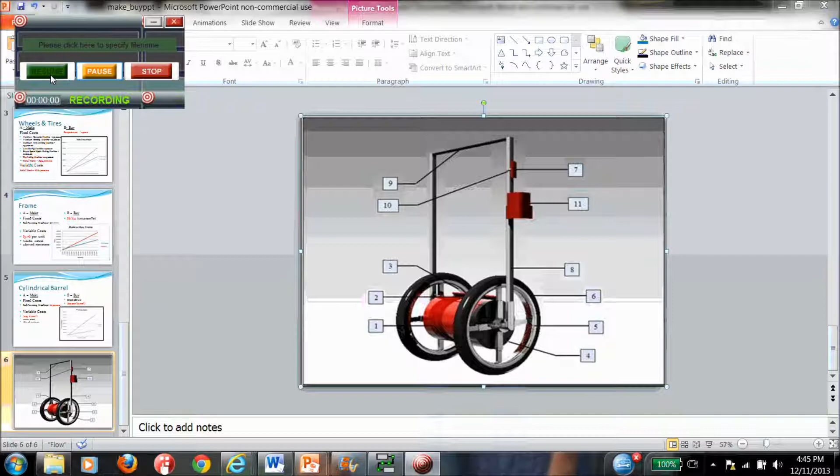Here's the AutoCAD model that we used to model the machine. Part number 1 is a cylindrical barrel made out of plastic. Number 2 is the filter. 3 is the lid, and 4 is the drain plug.

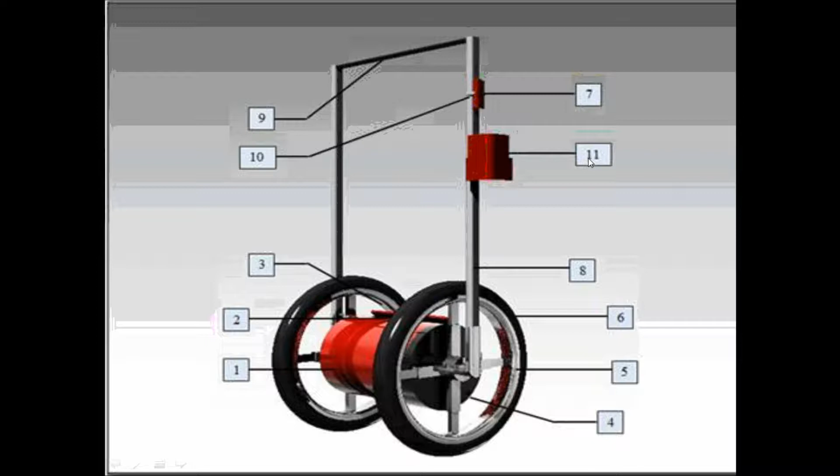5 is the rim, 6 is the tire, and 8 is the sheet metal frame. Number 9 is the handle, 10 is the bracket, 7 is the soap dispenser, and number 11 is the water container that we're going to use to hold extra filtered water.

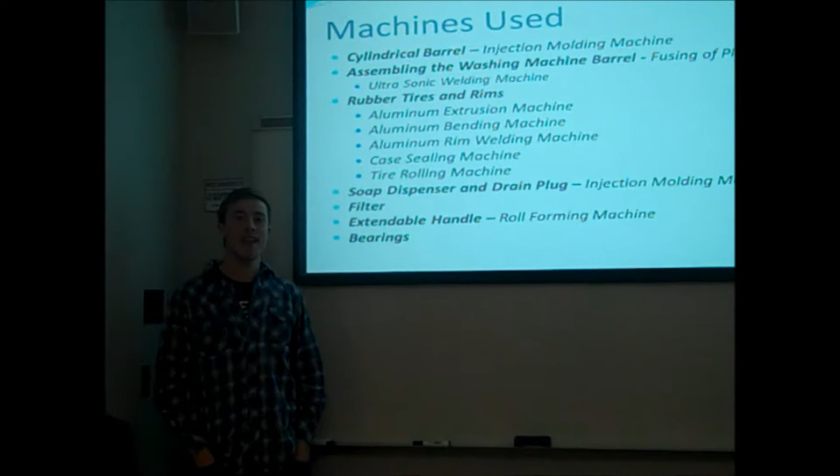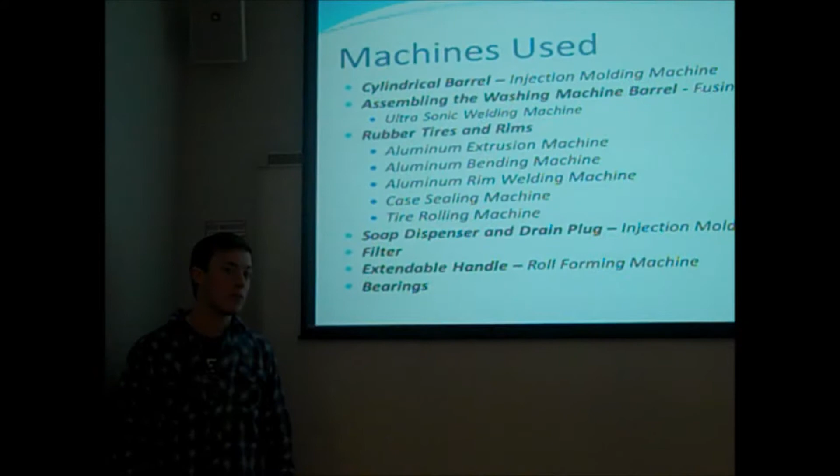Within the process, we need to analyze what machines we're going to use for what parts. The cylindrical barrel, we're going to use an injection molding machine. I thought that would be very easy because you can pour the material into the machine and it can mold it within the mold very quickly and very efficiently.

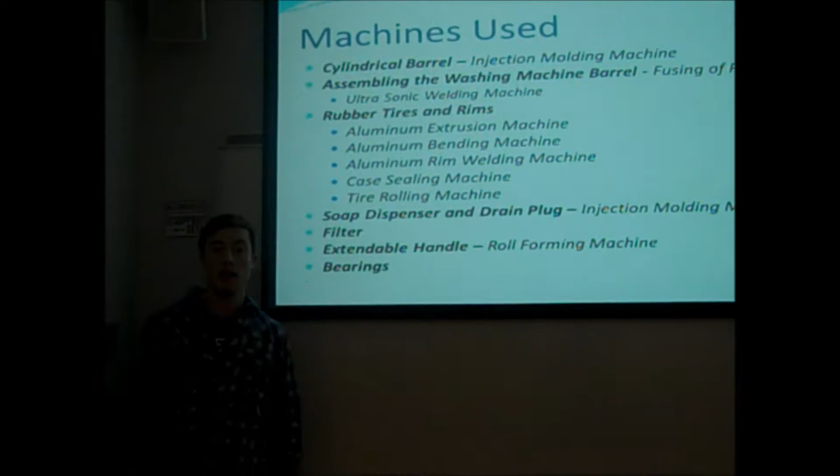Assembling the washing machine, we're going to use an ultrasonic welder. We're going to fuse the plastics together, and again, this is going to eliminate bolts and screws.

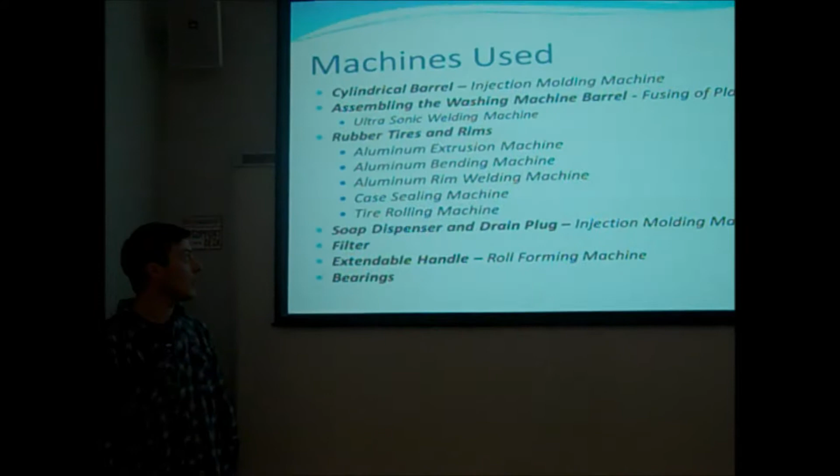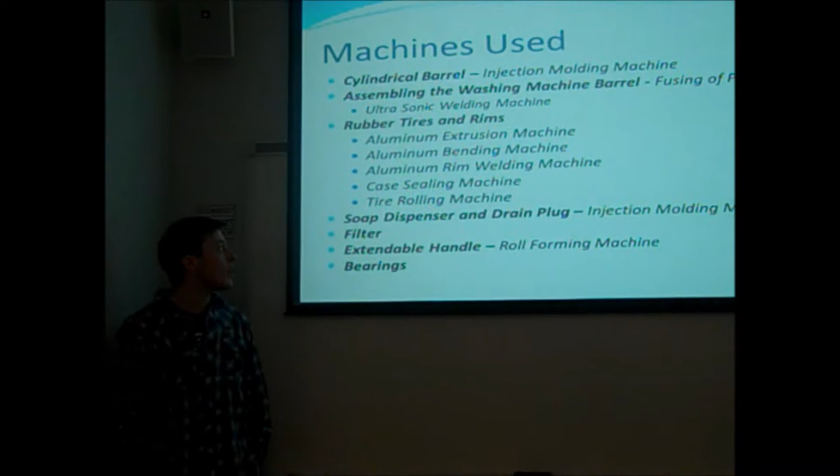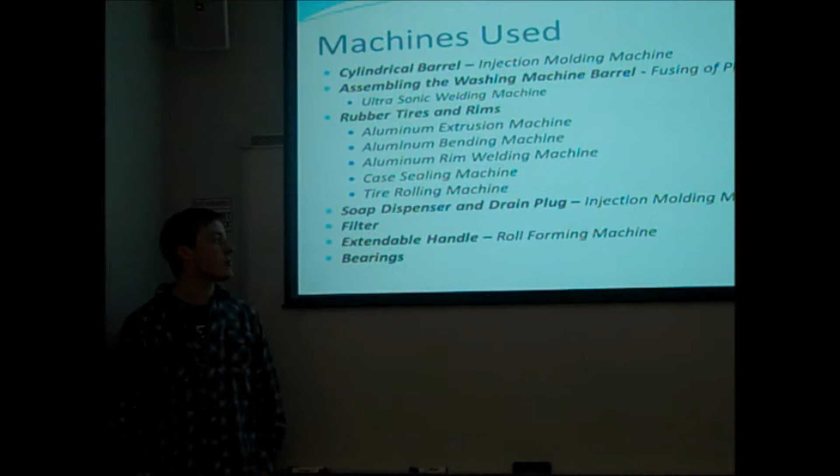For rubber tires and rims, if we're going to be making them, we would be using an aluminum extrusion machine, an aluminum bending machine, an aluminum rim welding machine, a case sealing machine, and a tire rolling machine. The soap dispenser and drain plug, we will also be using an injection molding machine.

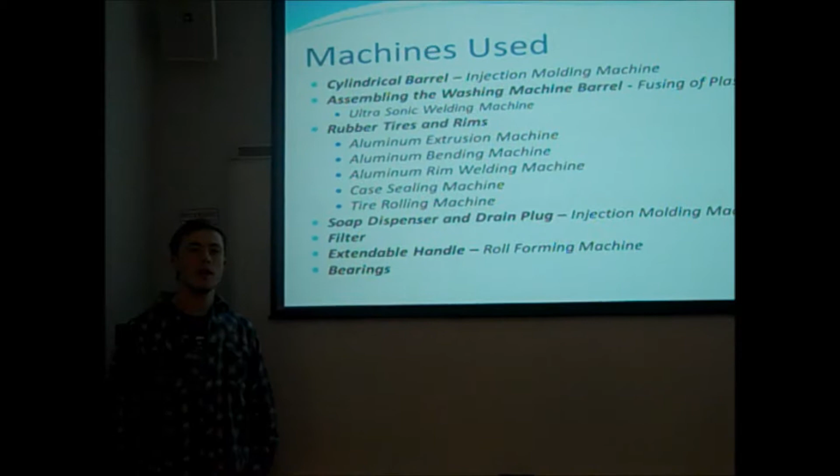The filter, we're not going to be making. We think that we would need to hire more people and more expertise to make the filter.

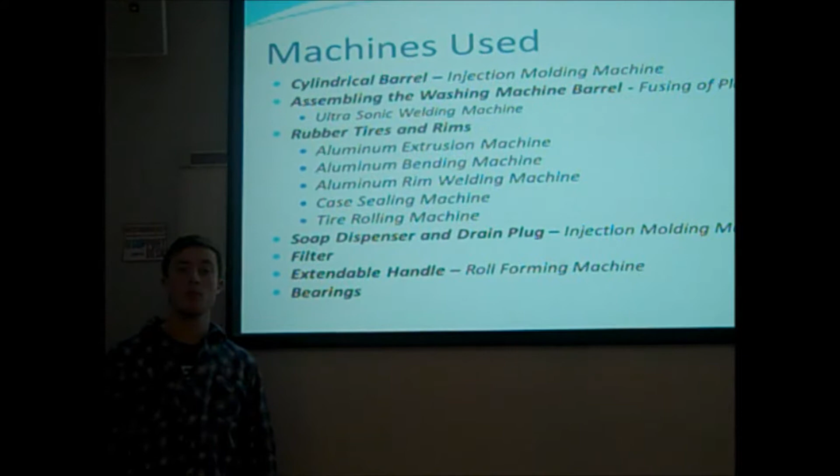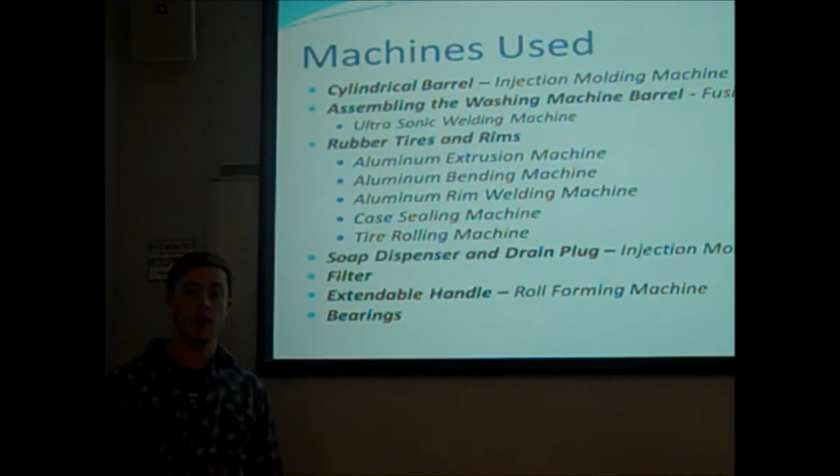For the extendable handle, we're going to be using a roll forming machine. And the bearings are very small, so we thought we could buy those at a very cheap price, and that will save investments in machines to make those.

Some of the major and essential components of our product which we had to define if we were going to make or buy include the following: the filter, the cylindrical barrel, the wheels and the tires, and the frame.

Starting off, we decided to right away buy the filters because they require a lot of experience and a lot of skill, and it's a specific product which can't be easily produced and manufactured. Therefore, we decided to buy this product, and then we focus on doing a make or buy analysis of the frame, of the wheels and the tires.

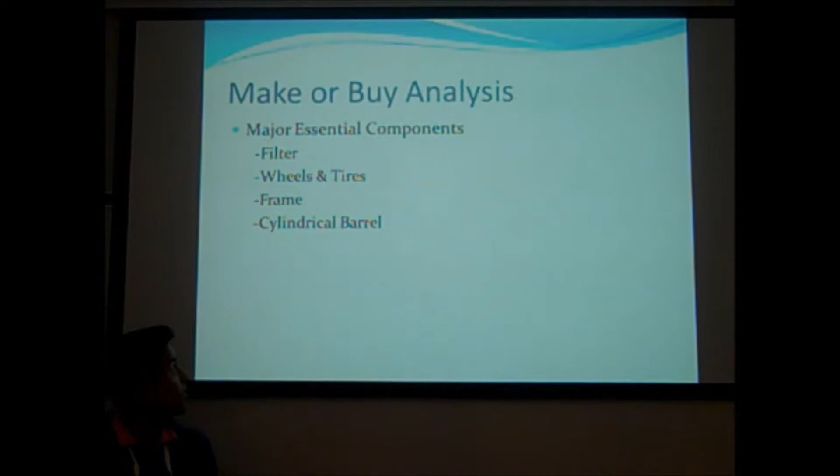As we can see in our next slide, some of the costs of the wheels and tires include all the machines required, and they yield a total fixed cost of $334,000, and the variable costs are $661,000, but this is for a 25,000 batch.

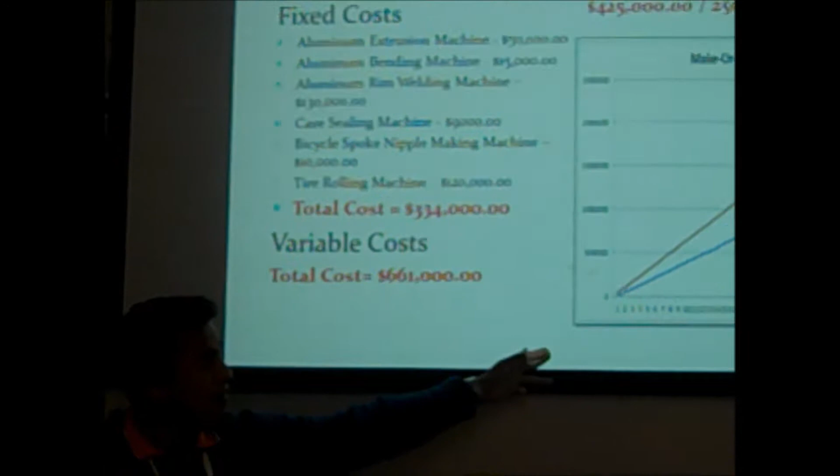Another contractor is willing to sell us the wheels and tires for $425,000 for a 25,000 batch. Based on this analysis, as we can see in the graph, it's easier and cheaper to buy the tires than to make them, and therefore we have decided to buy the tires.

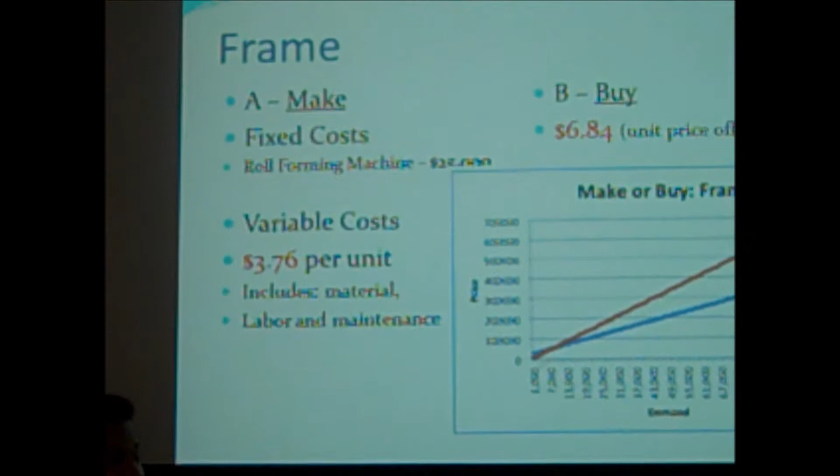Following this analysis, we decided to do a make or buy analysis of the frame. The fixed cost of the frame includes $25,000 for a roll forming machine, and the variable costs are $3.76 per unit for this same frame, including materials, labor, and maintenance.

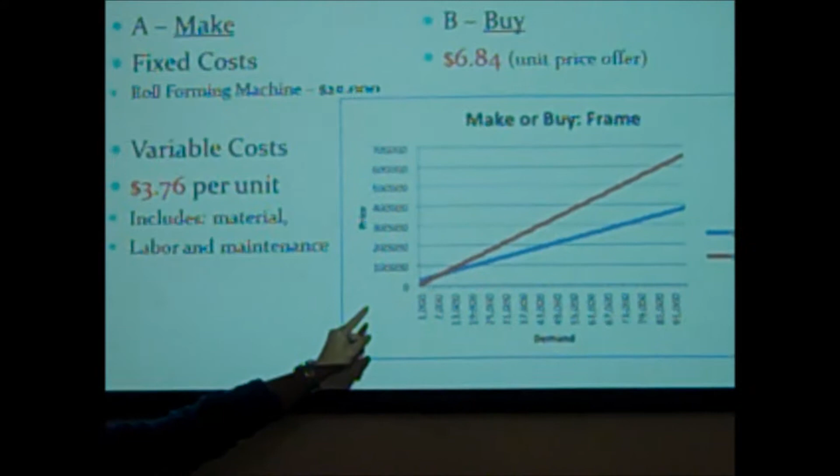Another contractor is offering to sell us the same frame for double the price, $6.84. As we can see, it starts off cheaper to buy, but considering our production, our break-even point is way below our demand. Therefore, it's recommended to make this product, and we have decided to make it.

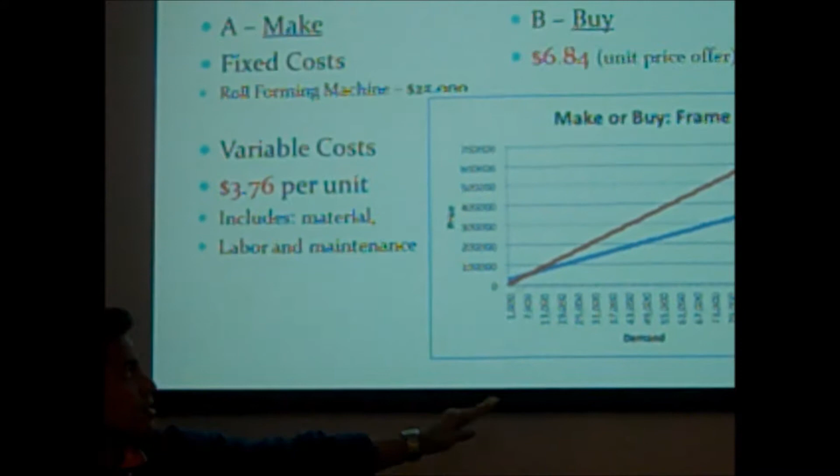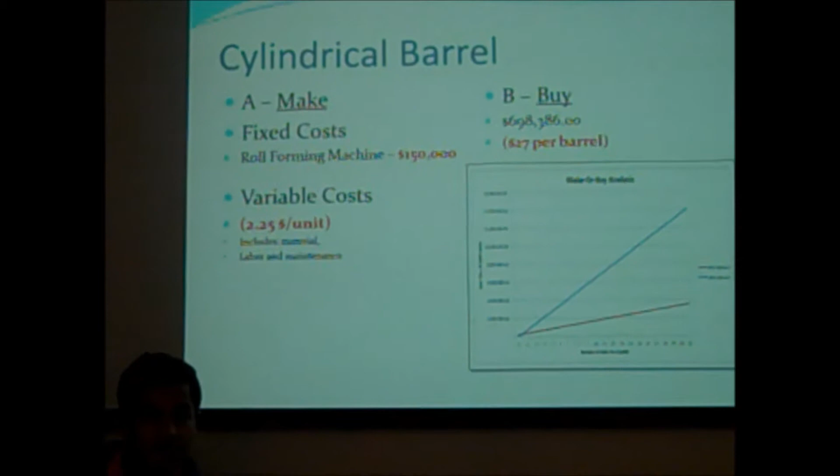The last product we decided to do a make-or-buy analysis on is our cylindrical barrel. This is one of the biggest components and requires the most material. But considering we would have a fixed cost of $150,000 and a variable cost of $2.25 per unit, this results in a better and cheaper alternative.

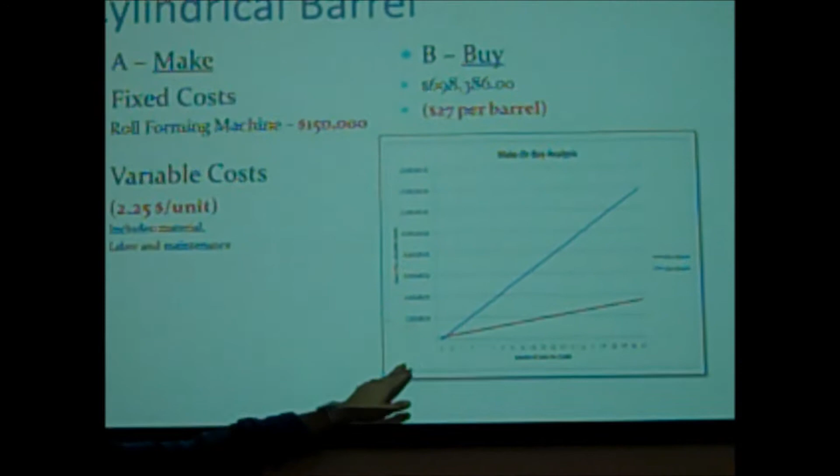This is compared to what our contractor is willing to sell us a barrel for, which is $27 per barrel. We can see the huge difference in the following table of how it is cheaper to make it than to buy it.

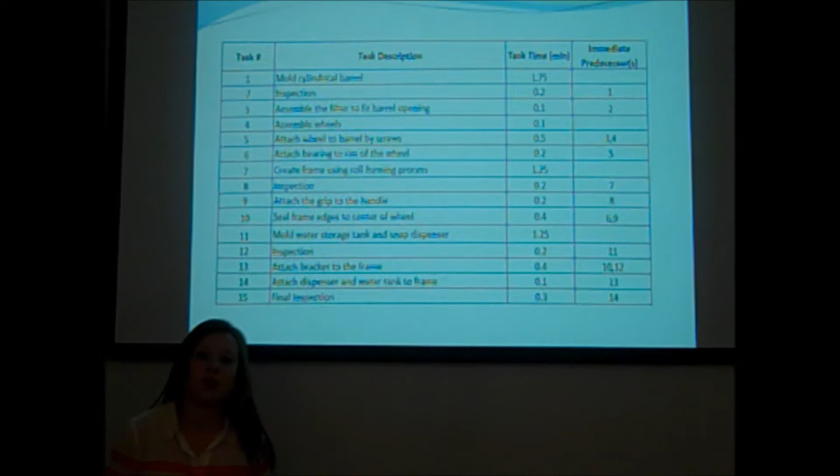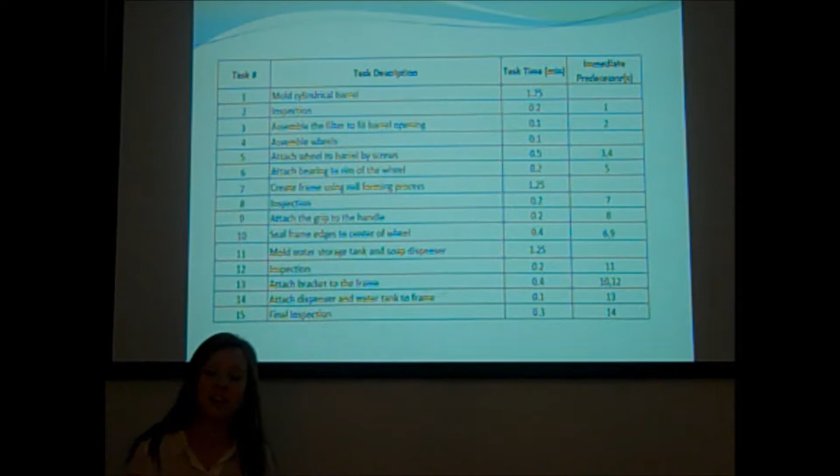So in order to talk about our process and the reason behind it, we should first go into all the different tasks. We wrote a list of all 15 tasks that need to be done to create our portable washing machine. The first task is to mold the cylindrical barrel.

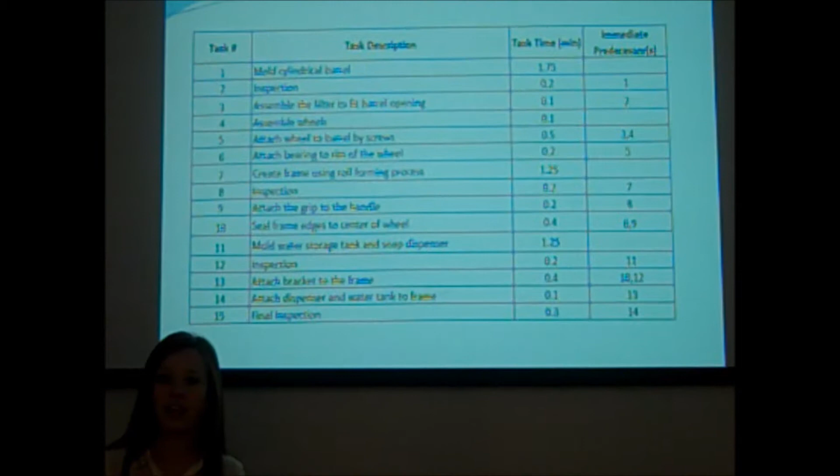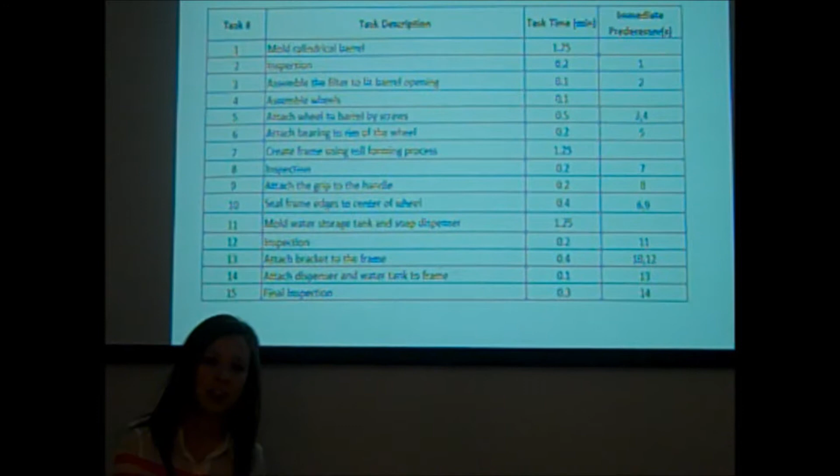This is done by the plastic injection machine, which molds it to have a lid and a drain plug. After this is done, we have to inspect it to make sure it came out of the mold properly. If we waited to inspect till the end, we might have to send it all the way back, rather than getting rid of bad ones early and not wasting other parts later down the line.

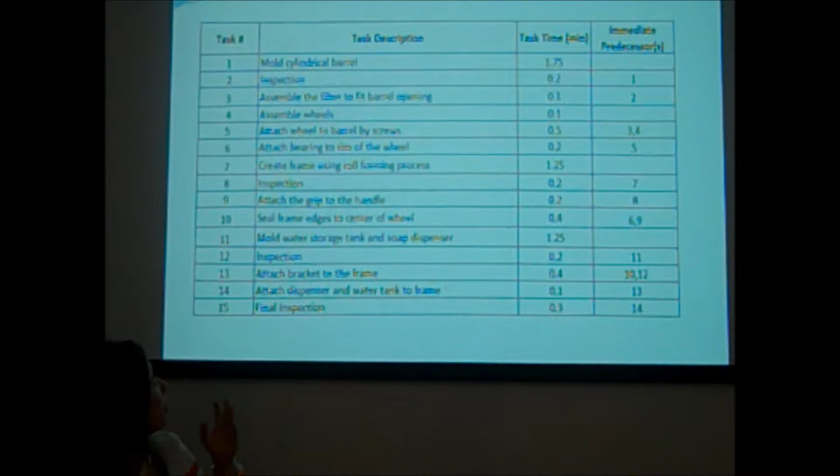Our third task is to assemble the filter to the barrel opening. We're going to put the filter in to filter the water inside of the barrel, and that's done after the barrel is created.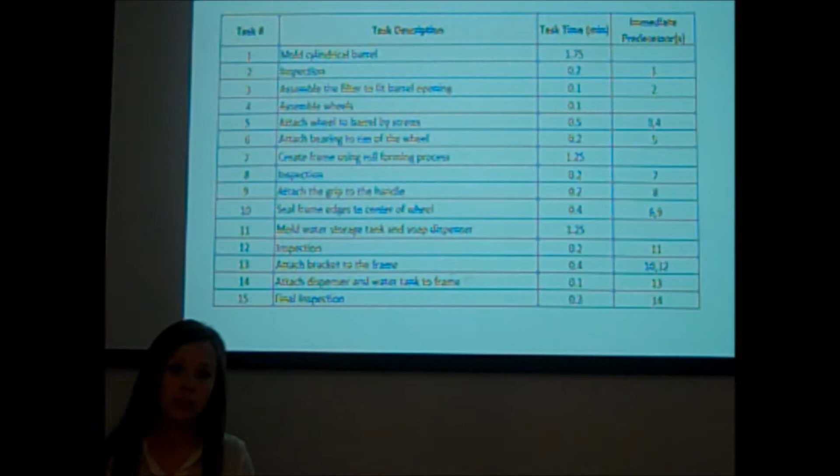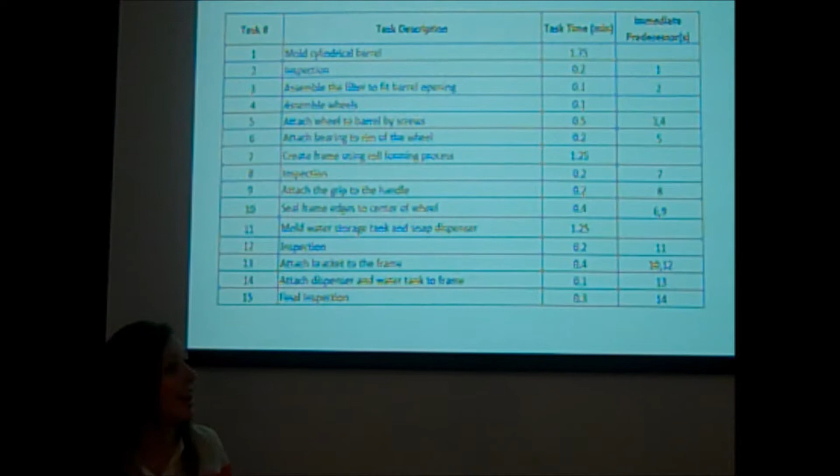Then we have to assemble the wheels. We're buying the rims separately from the rubber that's going to go on the outside of them, so we need to connect those. That's our next step. The next task after that is to attach the wheels to the barrel by screwing them on.

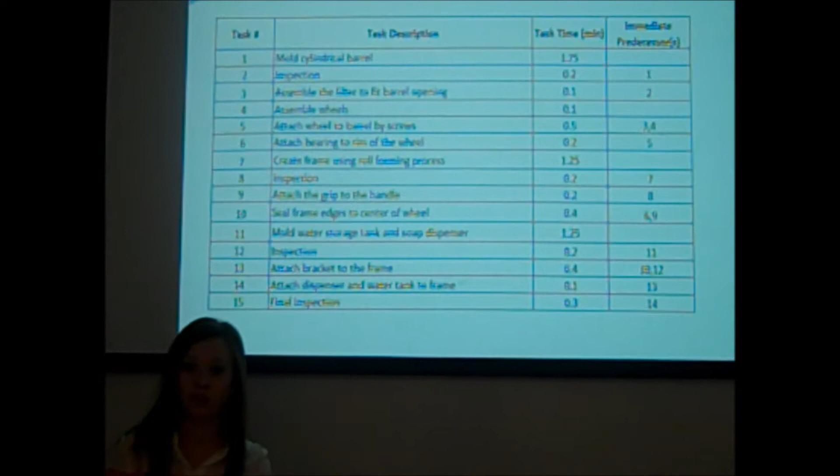Then we have to attach the bearings to the outside of the rims so that we can eventually attach our frame onto that. So we need to attach those bearings. Now we have the bearings, the wheels, and the barrel so far.

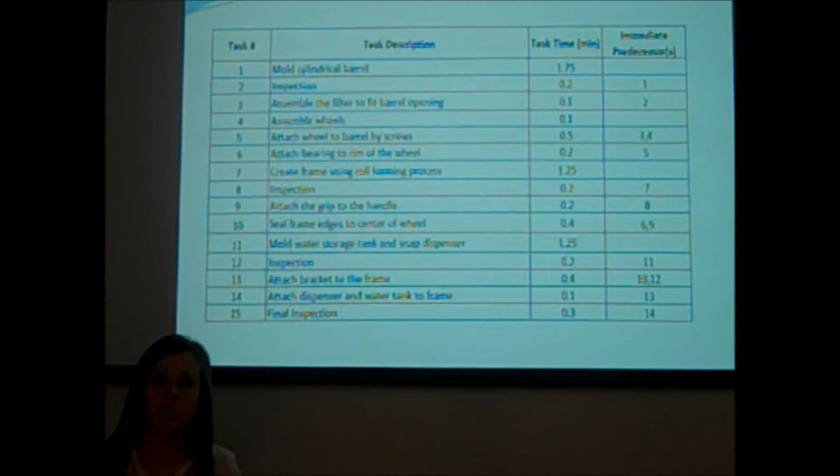Our next step after that is to create the frame using the roll forming machine. This is going to create the handle that we're going to use to roll the cart.

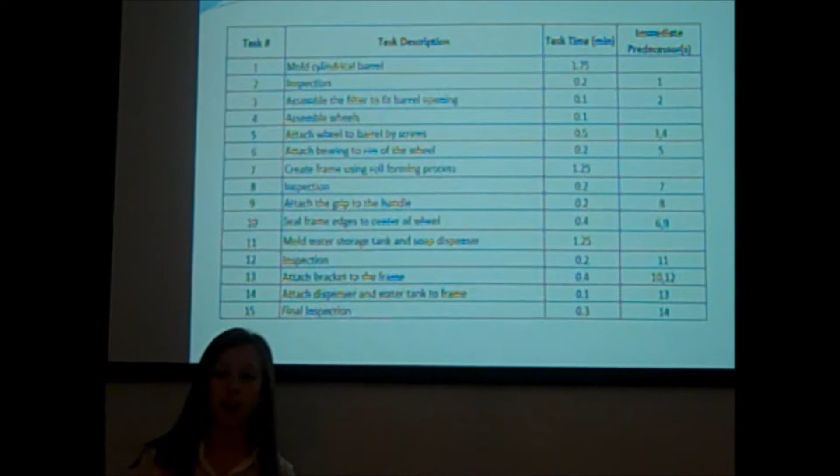After this is another inspection, because as we talked about earlier, if we inspect the frame right after it comes out of the machine, this will save time later in the process, rather than realizing these errors after we've already connected it to the rest of the barrel.

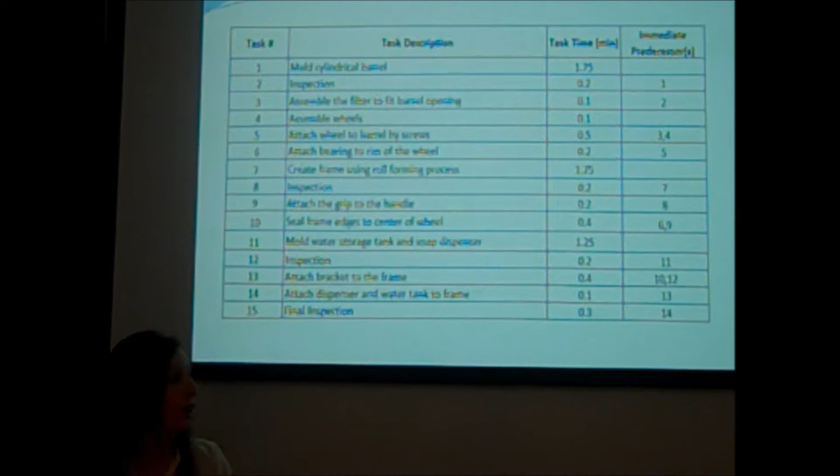The next step, we have to attach the grip to the top of the handle. This is going to be a rubber grip that can be put over it so people can push it more easily, and it will sit better in their hands.

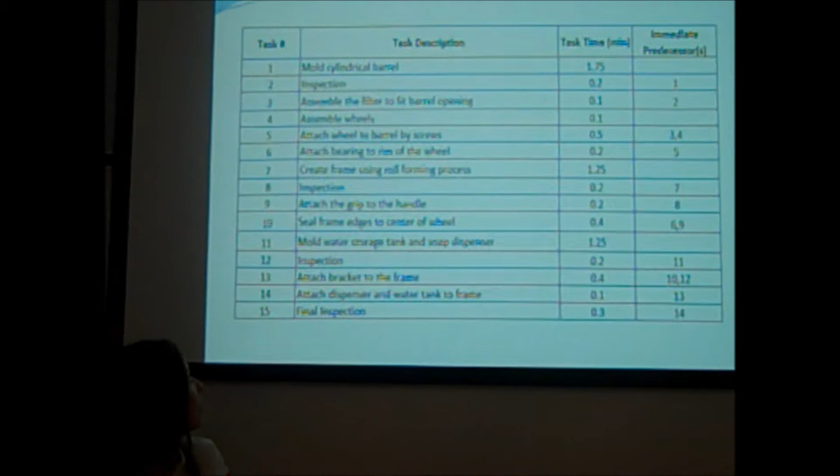Then we have to seal the frame edges to the center of the wheel. This is connecting the entire thing into one unit.

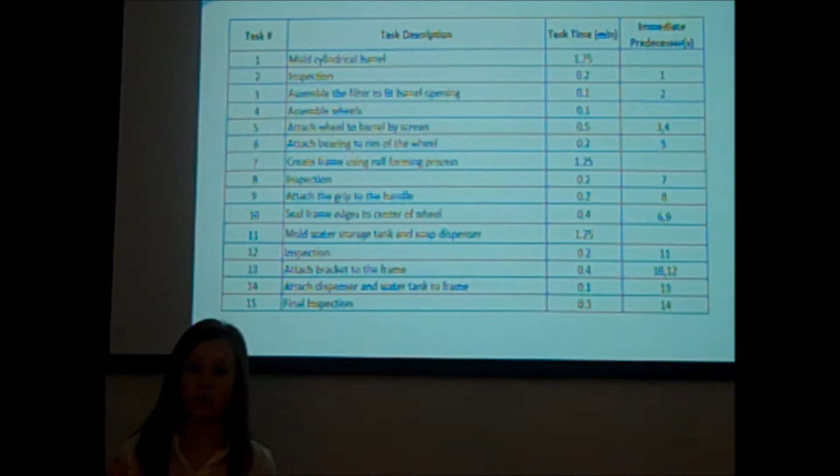After that, we're going to mold the storage tank for water so they can have extra water when they're done cleaning, and we're also going to mold the soap dispenser. That's going to use the plastic injection machine as well.

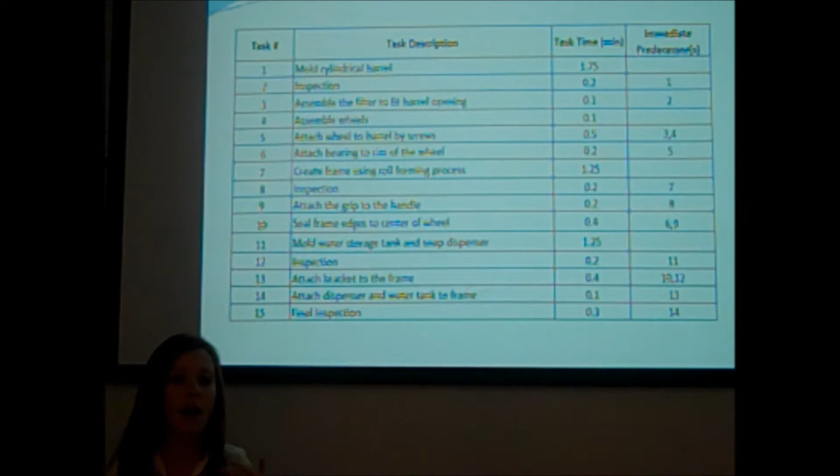After that, we're going to do one more inspection to make sure those come out fine. We're going to attach the brackets to the frame. These are going to be used to hold on the water storage and the soap dispenser.

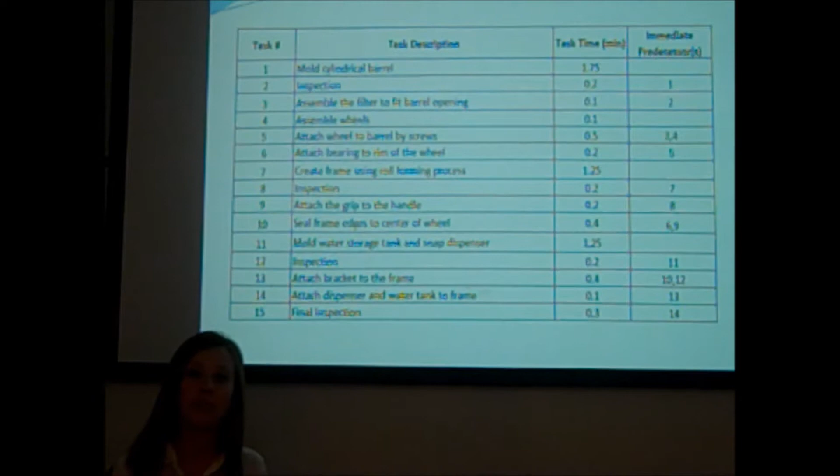Our next step, we're just going to attach the dispenser and the water storage onto it. And finally, we're going to do a big final inspection to make sure everything is right and connected fine. This is just going to go more into the reasoning of our process, why we've set it up the way we have.

We need to have it set up this way. If you go back and remember what we talked about for DFM, you want everything to start at the base. You want to have something at the bottom that's a base that everything else can be attached to and built off of. In this case, it's our barrel.

So we're going to have the barrel, and then we'll attach the wheels, we'll attach the frame to that, and then eventually attach the smaller parts. As you can see in the top left-hand corner, that's where we start with the molding of the injection barrel.

This is most important because, like I just talked about, it's the frame. We also want to make sure that we don't have bottlenecks. We want to make sure that everything's parallel and our workstations aren't overlapping. If we have cycle times that are too far off, everything won't be parallel, and we're going to have things that get stuck.

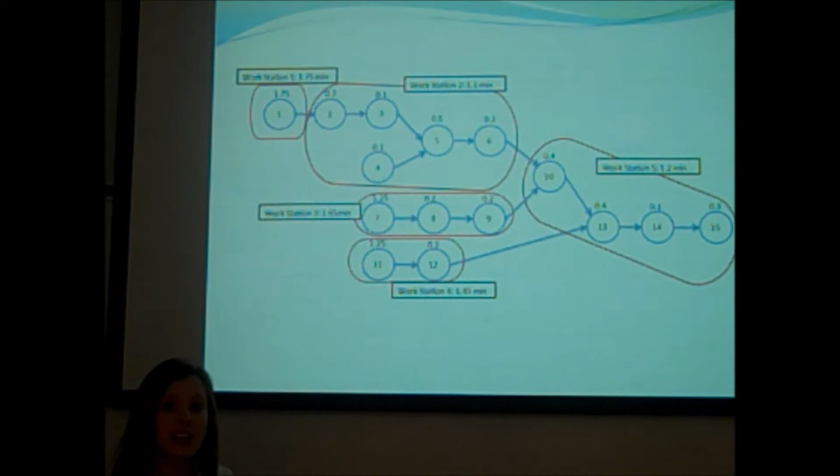This slide shows the 5 workstations that we put them in. Our cycle time for this process is 1.75 minutes, so 1 minute and 45 seconds. This is because that's how long it takes the first step to happen, the molding of the barrel. This is our longest step, so everything else can happen in less time than that.

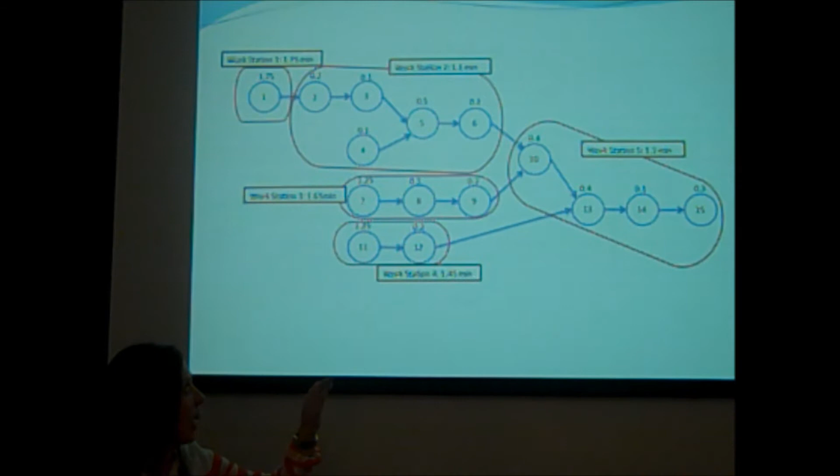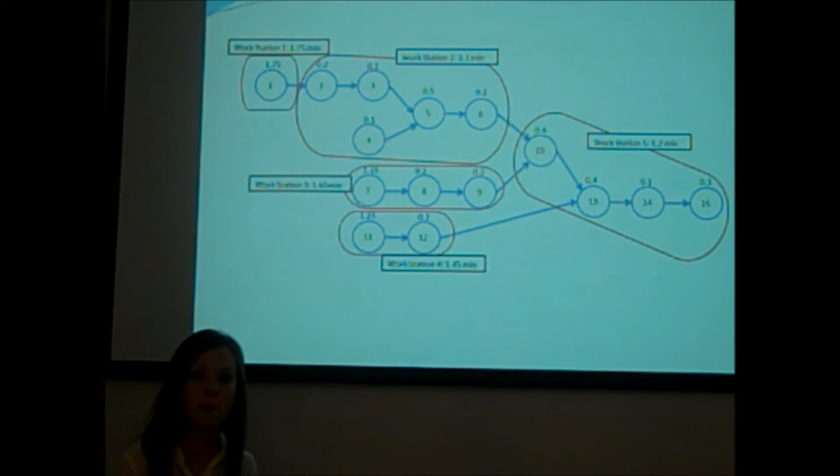So we have these 5 stations that have different cycle times, but they're all relatively close. Our smallest one is only 1.1 minutes, so they're not too far off. This is just why we've done this process, to decrease bottlenecks and increase productivity.

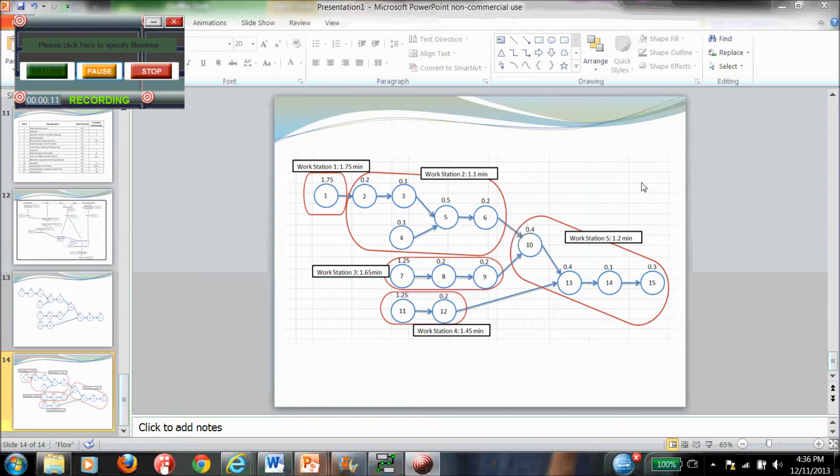Okay, as you guys can see, these are our workstations, which we already described and talked about previously. Now we're going to perform and create a simulation out of these workstations and our assembly lines on Simio. As you can see, we have sources at each leading entry of Workstation 1, Workstation 3, and Workstation 4.

When the material goes through Workstation 1, it passes through an inspection. If the part that has been manufactured in Workstation 1 does not meet the standards, it goes back up and through, and back down to the beginning of Workstation 1 to be resent through to meet the standards for quality. Meanwhile, the whole system is running.

There is material going through source 3 into Workstation 3, Workstation 4, and Workstation 1 all at the same time. This whole system is running at the same time.

And it all meets down into Workstation 5, and then it goes through to a final inspection, where again, if it does not meet the standards, it goes back up through Workstation 5 again, and then works through into the sink.

The processing time, as you can see from Workstation 5, there is an average task time of 1.2 minutes.